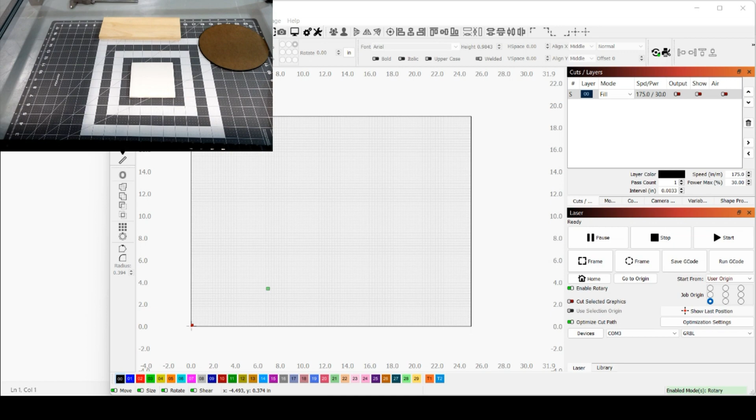Here we go. First thing we're going to do is create a rectangle. When you first create it, if it goes away, that's because it's on a layer that I just hid, so I'm going to show that layer.

Then I'm actually going to click away for a minute - I'm going to click it, and switch it to another layer, which you do by clicking on it and coming down here to any other layer. Let's just say layer 23. And then now I can actually hide the first layer again.

So we're going to take this rectangle and make it 4 1/4 by 4 1/4. Now I have mine in inches - if you have yours in millimeters, just measure your millimeter size and go from there.

So the material is my square right here, and you're going to want to come up here to unlock it, and I'm going to change it to 4.25, tab, 4.25, tab, and change it to line. It's not really a good dark color, so let me change it down here to 20. Here we go, it might be a little better to see.

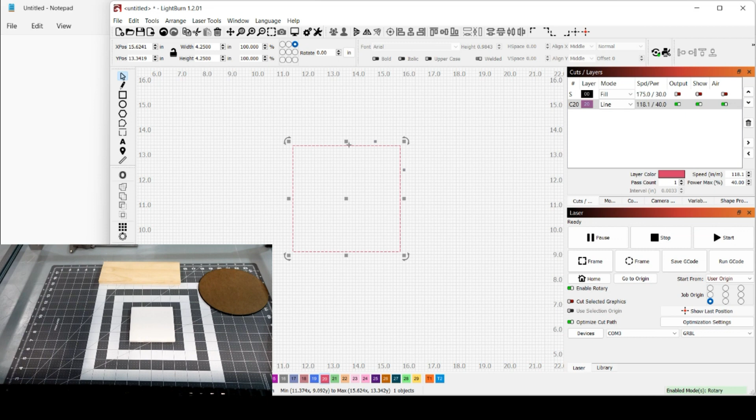So basically this represents my tile. Now I know this is 4 1/4 by 4 1/4 - this is the exact size of what I want to burn on. So whatever I put inside of this is what's going to fit inside there.

So if I turn on my Baby Yoda logo - let me click on it, oops, it's not locked. You want to make sure it's locked so it stays in proportion. I'm going to shrink it down, and let me move it up in here. So now I know the size of my Baby Yoda is going to fit perfectly inside that rectangle.

Now for me, I would probably make it a little bit bigger, and since I make sure I have it locked, I'm just going to increase the width, or you can, and it will increase the height accordingly because we have it locked, or you can just change the percentage.

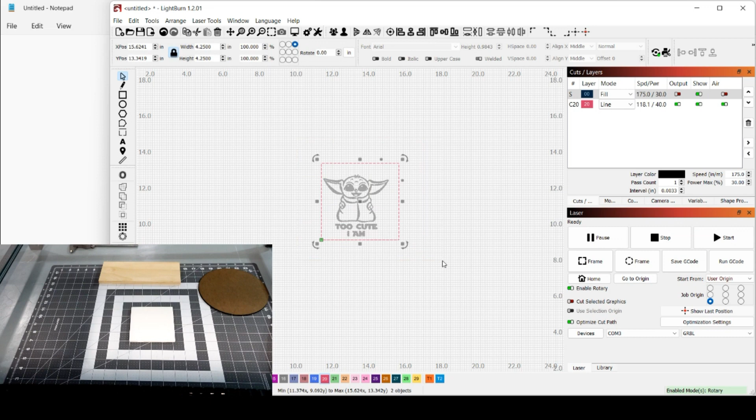And then what I'll do is I can select them both, come up here to center, and it's going to center it. So that's pretty much what I want to burn.

So what we need to do is set up the laser so that it's going to be right where I want it on that material. There's a couple different ways to do that.

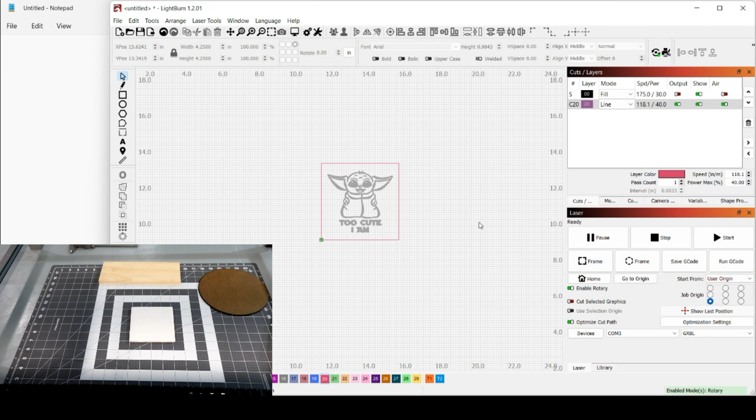In Lightburn, you have user origin, current position, and absolute coordinates. The two that I use the most are user origin and current position, and I'll go through both with you so you can decide which one you want to use.

Your 9 dots here represent where you're going to start burning on your material. You see the green dot here, that's the lower left. If I plan on my laser starting from the center left side, that's where I'm going to choose. If I want to do center, I'll pick center. So wherever that dot is is where you want your laser to be.

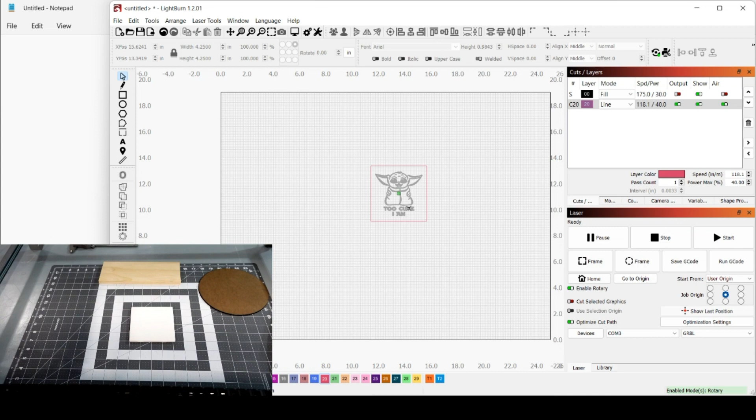If you zoom out, let me just turn the camera off for a second here. If you look on Lightburn, you'll see the little red crosshairs, and that's where the software thinks your laser is, and mine actually is. Mine's always to the left.

So what you're going to want to do is click Home, and this is for the 6550 Pro. If you don't have the 6550 Pro, you just need to make sure you know where it's at, as opposed to where the software thinks it's at, and I'll show you both right now.

If you have the 6550 Pro, just click Home and Lightburn's going to home your machine. If I click on the Move tab and click Get Position, it thinks it's at 0.039, and if I look here and click Get Position, that's where it thinks it's at on the machine.

So what I'm going to do is actually move my laser. Let me move this here. If I click here, I'm going to go to Arrange, Move Laser to the lower left corner of my selection. Now I'm going to turn my camera back on for you, and you'll see my laser coming in, and that's where it thinks my material is.

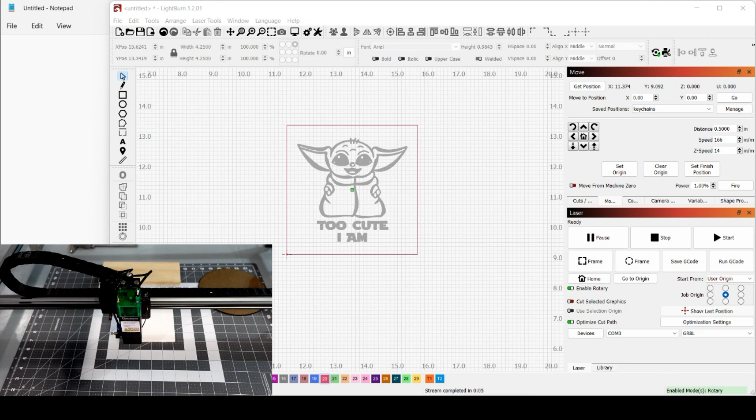So the laser now thinks it's on the left corner of your material. I'm going to zoom this out a little bit for you. What you could do is actually move your material to there, or you can move your machine up to where the left corner is.

I usually move my machine there. It just makes it a little easier for me, as long as it's not a far distance. You want to get it as close as you can, and then you might be able to just move it a little bit. But remember, you're going to be off from your actual home position for the 6550 Pro.

For the regular 6550, you could do the exact same thing. Just move your laser to the bottom left, tell it to come here, and then again just move it by hand to where the corner is.

Now I have my shield off so you can see, and what we're going to do is—if you don't have the fire button here on the Move tab, you can get it by going to Edit. Actually, let me show you. Hold on one second here. Okay, you can get it.

Let me turn that off. You can get it by going to Edit, Device Settings. And Enable Laser Fire button right here. So you turn that on and click OK.

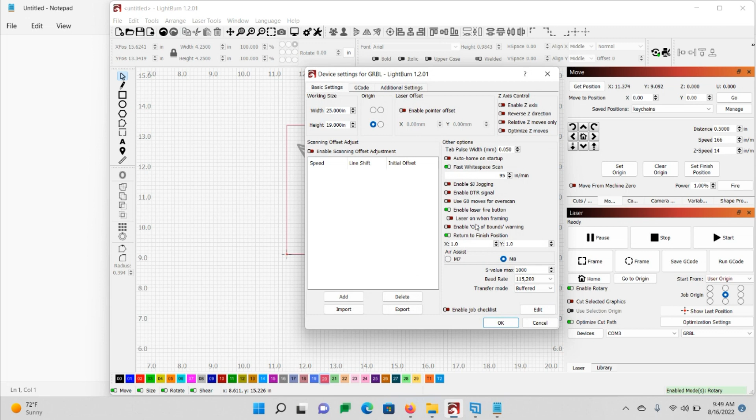You may have to close your software and reopen it again. But what we want to do is set it to 1%, and then we're going to click Fire. Let me turn that back on. When you do that, you're going to notice your laser light come on, and it's going to be on really low power.

Now, I don't want to keep mine on because I don't want it to burn my mat here. But I'm going to need to lower mine down a little bit because obviously I'm up way too far. Get that down a little bit here, and get your distance that you need from your material.

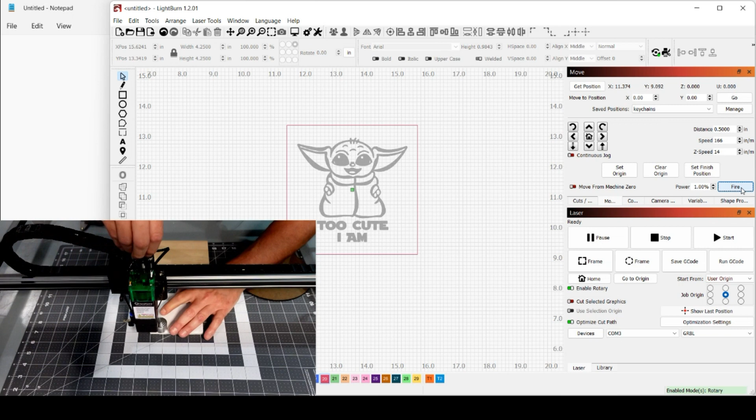I'm just going to get mine close here. We're not going to burn. We're going to want that light to come on right on the corner. So what I'm going to do is turn the fire button on, and then move the laser slightly so it hits that corner, which is right where I want it, just on that corner.

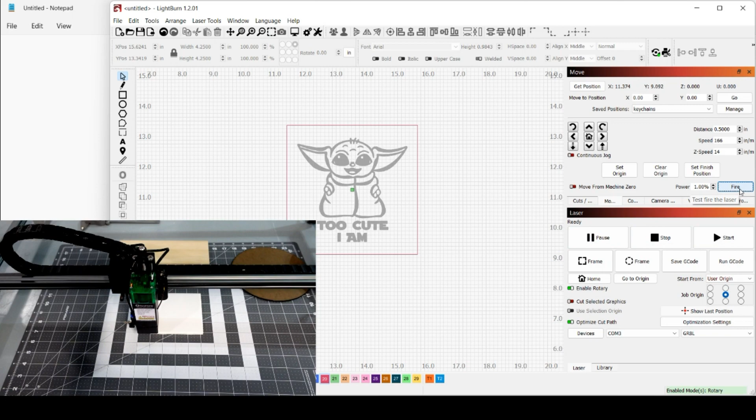Turn the laser off. Let me lower the camera so you can see what I'm talking about here, that might give a better angle. So hit the fire button, and I have it set right to that corner, the bottom left corner. Now I'm currently on user origin, and I want mine to be the bottom left corner of my material.

So I'm going to make sure I have user origin, bottom left hand side checked. And then, before you do a frame, if you want to be positive, click on your frame and then go up to arrange, move laser to the lower right of selection, it's going to move over, and now turn your fire button on again.

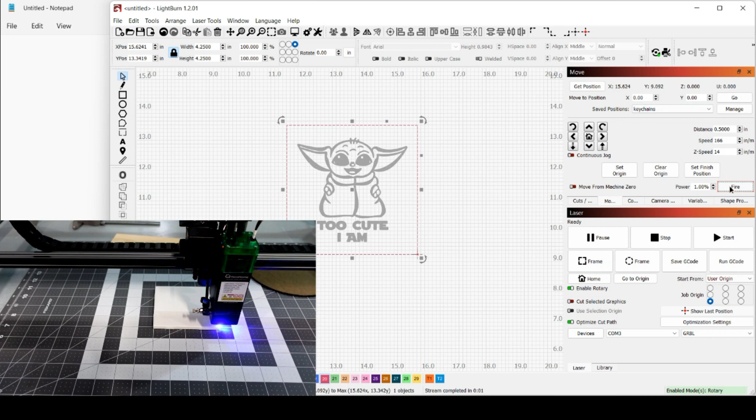Now if you find it's too far up the material or too far down, I lost my little marker. If you find it's too far up or too far down, then you may not be in square. But what we're going to do is turn the laser on, and we want it right on this corner. That's pretty much how I set mine up, and it's dead on the corner.

Now I'm going to go back, arrange, move laser to left side, and then click set origin. Remember, we're on user origin here, so we need to set the origin. Now no matter where you move your laser to, it's going to bring it back there. So if I jog my laser to the left a little bit, I can say go back to origin, and it's going to put it right back there.

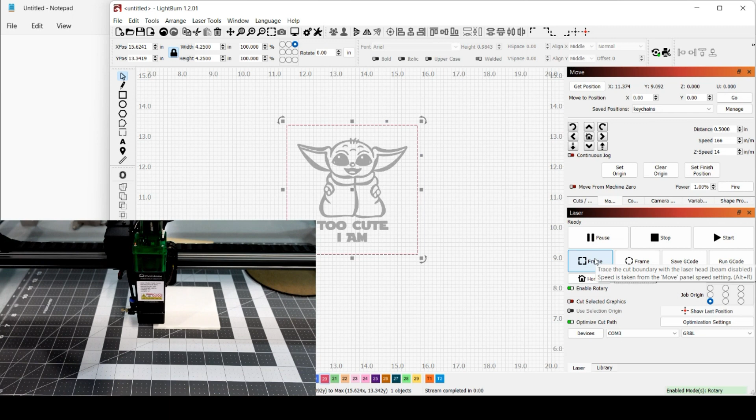So now we're going to do frame and have it frame the whole material. But if you hold the shift key when you hit frame, it makes the laser come on at a low power, and I'm going to watch the laser as it goes around the entire piece here, making sure it stays just on the edge.

If I do my frame and it goes off on this side too much, and on the material on this side over here, then I'm going to grab this wheel with my hand and move the laser a little bit like that. So let's go ahead and hold the shift key and click frame.

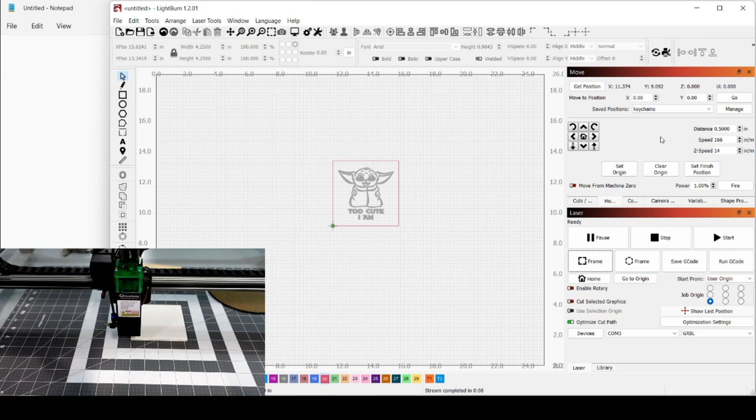I'm watching the laser and making sure it's staying on the material. One thing I should have mentioned earlier, under your layers, make sure you only have your frame layer on. Let me move this over a little bit here.

So we want to have the frame layer on, because that's what we're going to trace here. And if you find your laser's moving too fast, hit the move tab and slow it down a little bit. I'm going to slow mine down to 130, and then hit frame again.

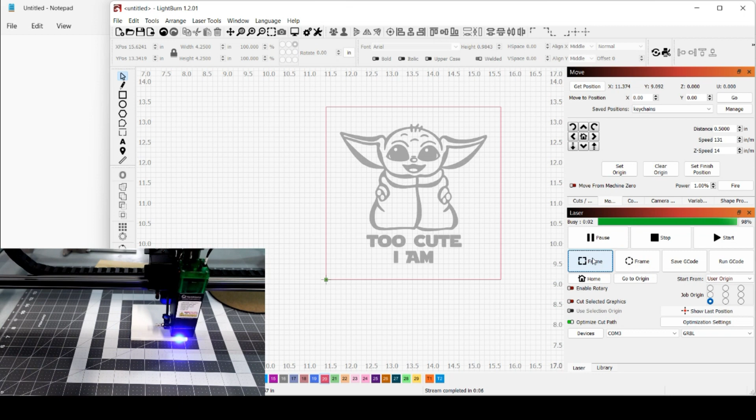If you notice on mine, on the right hand side it's on the edge, the top is off, and the left side is a little bit off. So I'm going to pull this to the right just a tad, very, very little bit. And it's off here too, so the same thing with pulling it backward, just a very, very little bit.

And I'm going to hold the shift key and hit frame again. That's good, that's actually perfect there, perfect on the back, and perfect on the left side.

So now that we have that, we already have our origin set, and now I feel confident knowing that if I go back to cuts and turn on output on the Too Cute I Am, click on preview, right click, go to preview, you can see it's going to cut inside of that square, and you want to make sure you turn your framing off.

So it's only going to do your logo artwork or whatever you have, and then you should be right within the center. Even at this point, if you want to triple check yourself, does it think this logo or the artwork is going to be placed correctly?

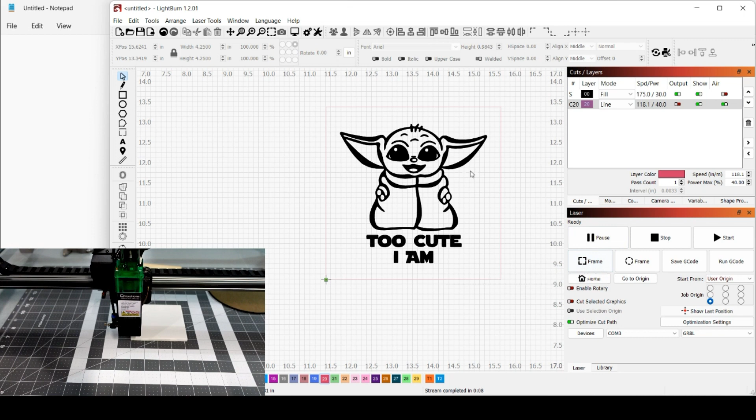If you hold the shift key and click frame now, it's actually going to frame the actual Yoda itself. So if I hold the shift key and click frame, as you can see, it's actually going to frame just the area that it thinks the Yoda is in. So I'm pretty much dead on now. And that's how I would do it using the user origin.

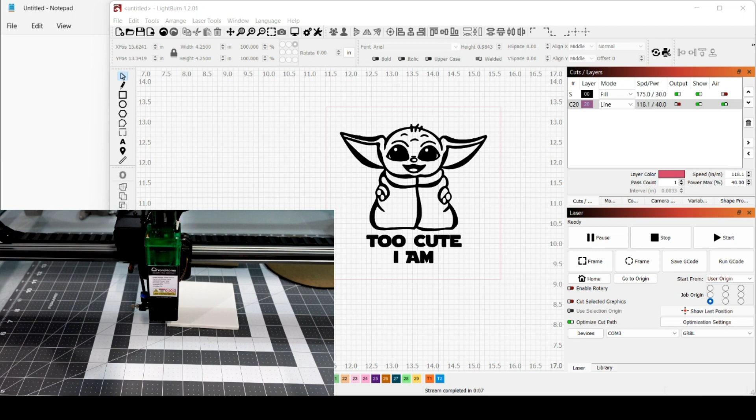Now that's the exact same thing if you had a rectangle. So if I had a rectangle, I would do the exact same thing. So for example, on this, let's just say hypothetically that is 9 1/4 by 3 1/2. So I would come over here. I mean, I can actually just leave this if I want. And let me get rid of my camera for a second here.

I would create a rectangle. Here, I'm going to deselect using the rectangle. I'm going to unlock it. The width was 9 1/2, I think I said, by 3 3/4. I forgot that quick. 9 1/4 by 3 1/2. I was way off. 9 1/4 by 3.50, 3 1/2. And now I'm going to lock it, and I'm going to turn off the Yoda for a second here, and I'm going to turn on the rectangles.

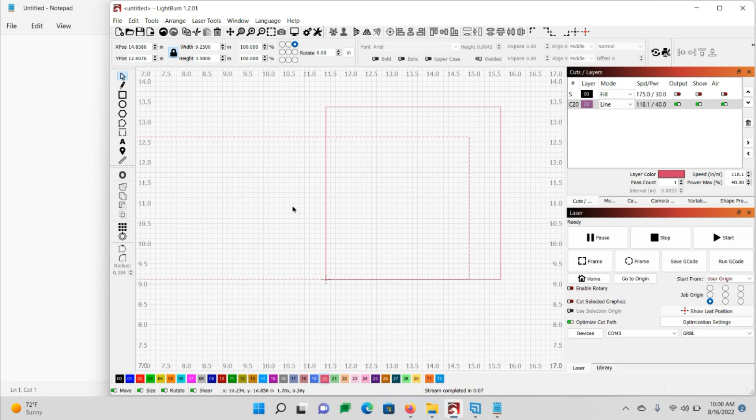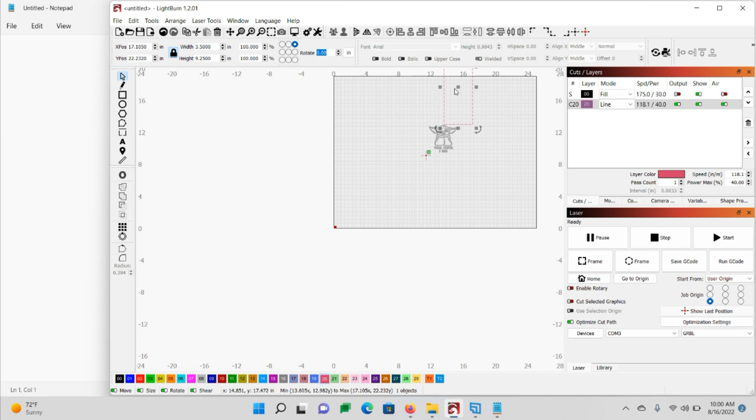So as you could see, if I wanted to, I could now burn within this rectangle. So let's say I get rid of this square because I don't have that hypothetically. Now I have a rectangle. If I want to put the Yoda inside the rectangle, I could shrink it here, or I could click this rectangle and rotate it up here 90 degrees. And whoops, bring it down here. And I could put my Yoda inside of that if I wanted to, and I would know.

Actually, if you look right now, my Yoda's too big. If you can see, if I turn my board, I would actually be over. So that's why I like doing it this way. So now I know what size to make the Yoda. So I'll shrink the Yoda. And another thing I want to show you too is, see how I just did that? Let me undo that. Whoops.

If I want the Yoda to shrink dead center evenly all the way around, up here you see the 9 squares here. This is going to be where your center point is, your anchor point, let's say. So my anchor point right now is in the middle. So if I lower the percentage, it's going to shrink everything to the dead center. If I click on the bottom left, it's going to shrink everything to the anchor point on the bottom left. So that's one good thing to know also. So that's how we do the user origin.

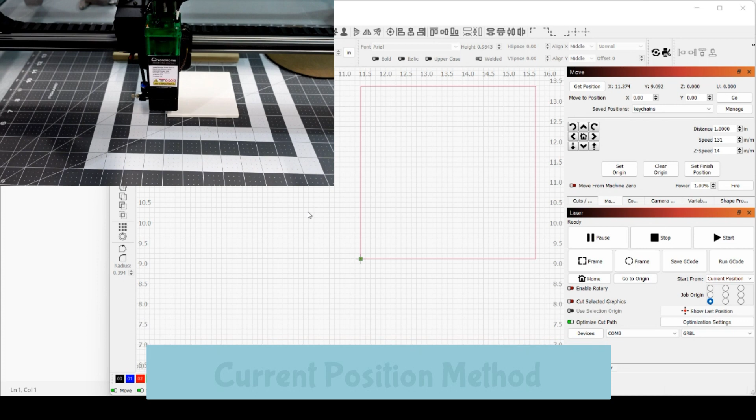Okay, now another method is using current position. So what current position does is wherever your laser is, it's actually going to start lasering at the anchor point. In other words, right here, let's just use the bottom left as an example, as opposed to center or top right or whatever. So no matter where the laser is, it's simply going to start from wherever it's at, as if it is sitting at the bottom left hand side of your image, excuse me, on the screen.

So this is the square we have, and right now if you look here, if you click this show last position, you'll see the plus come off and on. The software thinks the laser is right there, and we're using the bottom left origin as where we want the laser to start from, which is where the green square is. So if you'll notice, I'm going to click frame, and the laser is simply going to frame the square where it's at.

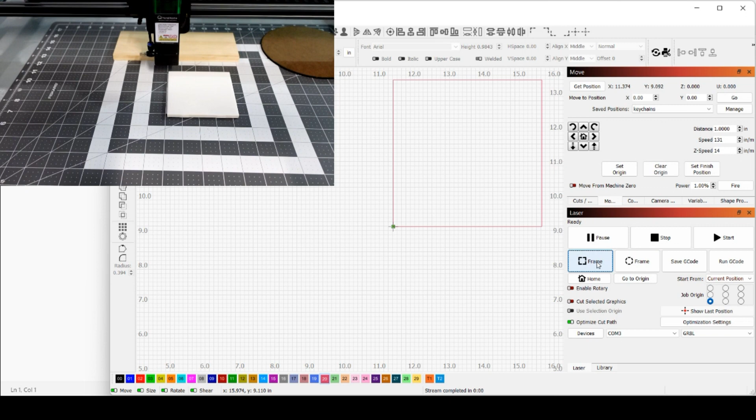And what this is kind of for is, let's say you don't want to move your machine by hand, you only want to move it using these move controls, very, very little, then you could actually do that. Let's say you would move the laser over here, let's move it down. And if you see here, you see the little crosshair. This is where the software thinks the laser is. However, it's going to start at the current position, right here.

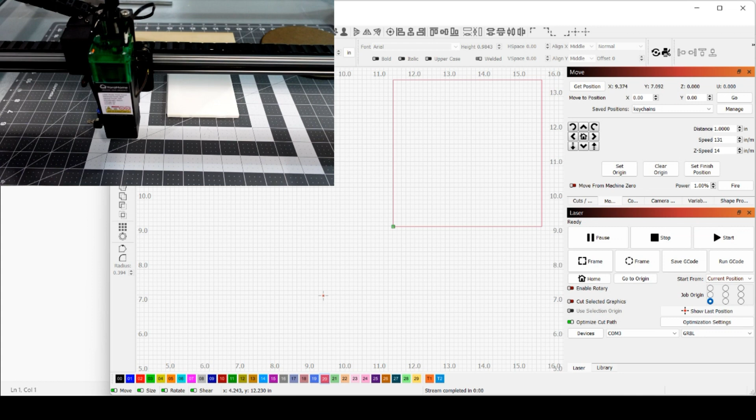So if I click frame, it's just going to simply start framing this right where it sits right now, as if it's over your material. So again, what this is for is, let's say that you home your machine, and you want to move your laser all the way over here. Here's a great example. Let's say my material is here, and I want to move my laser over to the right.

And then down, over, maybe one more. Just hypothetically, let's say that's it. I'm pretty close though. If you'll notice, my laser is actually here on the physical dimensions of the machine, I guess you could say. However, because I have it set at current position, bottom left, it's actually going to start right here. So if I click frame right here, it's going to frame my actual square because that's simply where it's starting from.

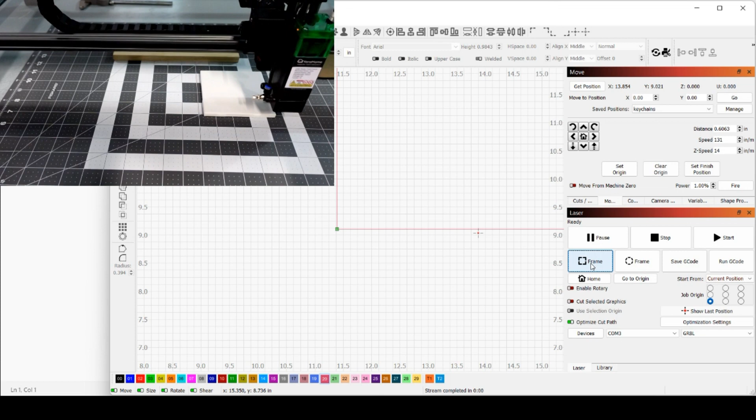This also applies if you want to start in the center. Let's say you have a mark right here in the center, and that's where you want to start from. You can actually click on your job origin over here where the current position, we're going to say click center, and you see the green dot now is here, the green square. That's where it thinks it's going to start from.

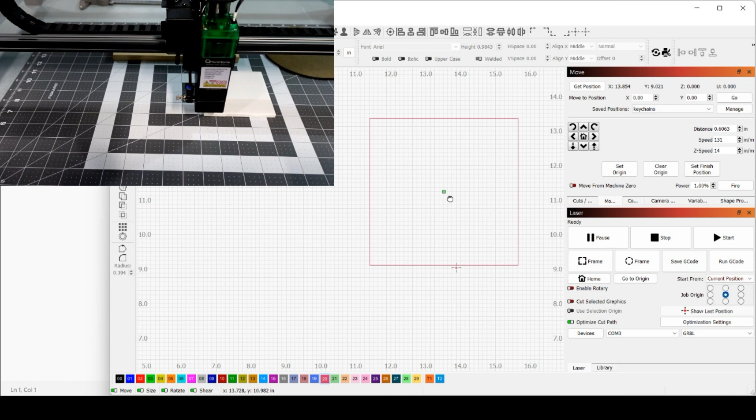So actually, hypothetically, if I clicked frame right now, it's going to come down to the corner here and actually frame the square and then go back to the center. But in this instance, I could actually just move my laser. Let's just say hypothetically it thinks that's in the center. I could actually just now click frame, and it's going to actually think that it was in the center of my material. So that's what current position is.

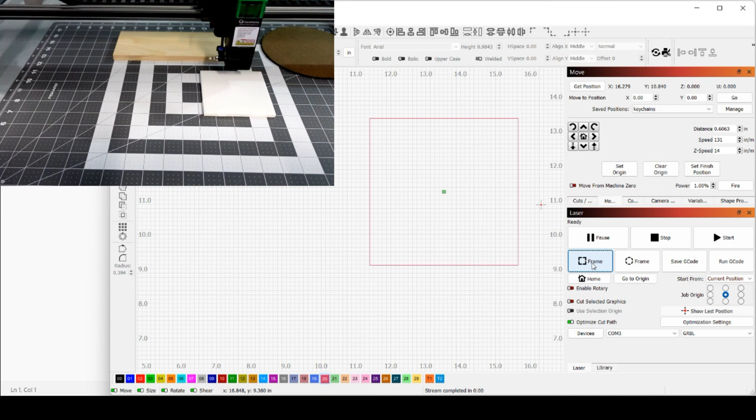Pretty much it's going to start wherever it's simply placed at, wherever you have your origin on your software on Lightburn. So I hope that you kind of understand that a little bit. It's more so of you wanting to move your laser head and have the software ignore where it thinks your laser actually is. We don't care where it thinks it is. You can actually turn the plus off. It doesn't care where it's at. It's simply going to assume that it is right there where the square is every time.

So that's kind of handy for different things. I actually use that when I do the tumblers. It's one of the things that I use is current position, because I don't want the laser to care where it thinks it is. I want it to start where I tell it to start. And it's really handy for tumblers and things like that. So let's move on to absolute coords.

So absolute coords is, let's turn on my laser position. What absolute coords does is, so the machine thinks my laser is right here. If I click get position, it thinks my laser is right here, okay? But if you look at my screen, my laser is actually on the left side. So when I tell this to frame, since it thinks it's right here, it's actually going to move down to the bottom left, then go all the way around, and then it's going to come back to the bottom left every time.

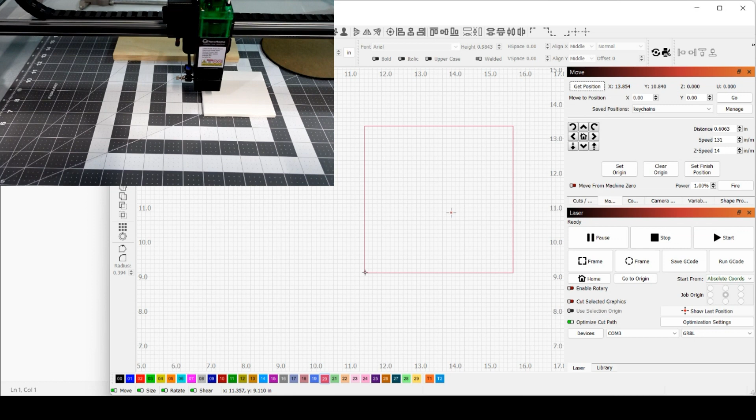So I hit frame, and what it did was it moved from here over to the bottom left corner, went up and around, and then came back and stopped where it thinks the bottom left corner is. Now, this is just that Lightburn didn't keep up yet. So if I come up here and click get position, you'll notice now it put the crosshairs back down here, because now this is where it thinks it's at.

So let's just say I move my laser over to here 2 times, 3 times to the left or whatever, it's actually going to move back to this corner and then go up and around. This is good for a couple different things. Let me go ahead and click frame, and I'll show you. It's going to move here real fast, and then it's going to come up over and then go back around.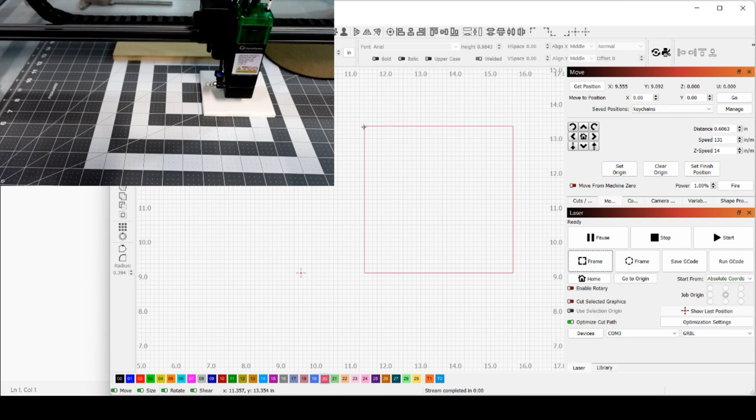So let's say you wanted to move your material. So if I move my material down, I'm sorry, I didn't click get position. Remember, it thought it was here at this corner. So now I moved my material down a little bit, and I'm going to move it over some. Now when I click frame, it's going to actually shoot down to this corner and then go up around and end back at this corner.

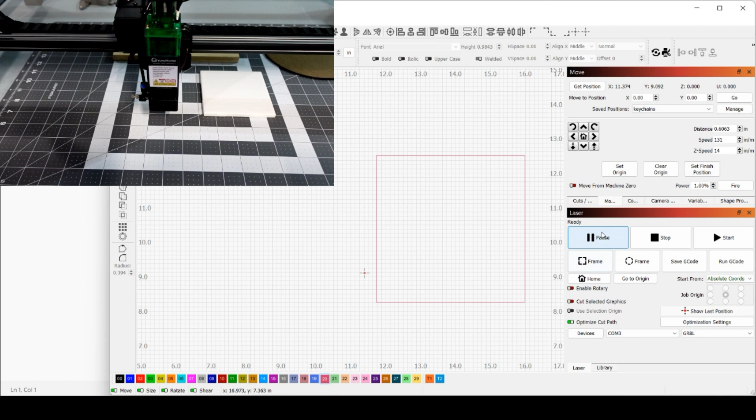So this is another way that you could do it if you have different layers of things. It's actually okay for doing tumblers as well. So I'm going to click frame and show you something here.

And if I click get position, now you see it thinks it's here. I think one of the things that this is good for is, if you've ever seen some of the different stuff, like if you do 3D, different layers from a CNC machine, you can actually have a material placed on the bed, and let's just say the laser is just a little bit off. Let's just say it's a bird or something like that here. You could actually take that, click it, and you could move it up a little bit and over a little bit, up a little bit, over a little bit.

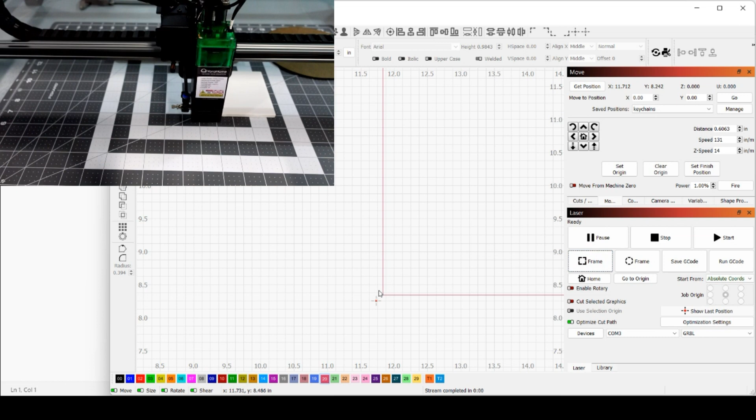And even if you're using the cameras, if you have a camera and it takes a picture in the back and you see the background there, when you do that, now if you do frame, it'll actually move to here and it will change where the start position is, and that's the absolute coords. It's going to be the bottom left hand side every time. So I'm going to click frame. See, it's going to move up, and now it's going to frame that. And it's going to think that it is right there again.

So, you know, there's different ways that you can do it. It really depends on what you're trying to burn. The two common ones that I use are the user origin and current position. They're the two main ones that I use the most. I think actually what I do use the most is user origin, honestly.

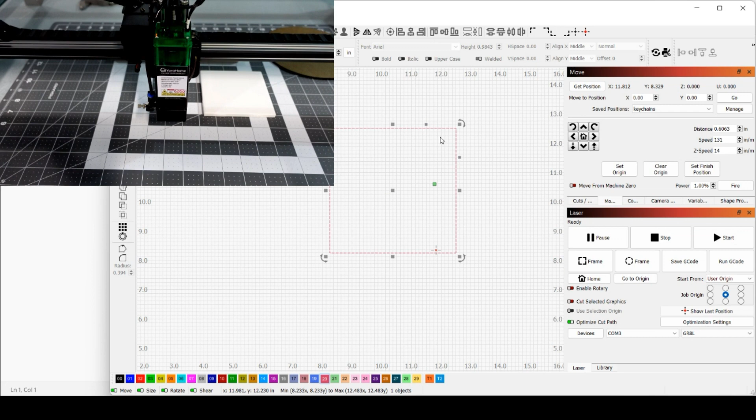Okay, I want to show you real quick. It's easy to find the center of a square, and it's easy to find the center of a rectangle, and it's not so easy to find it of a circle. Sometimes you have it, sometimes you don't. But what I want to show you is, if you don't have the center for a circle, an easy way what I do to carve on a circle. So I'm going to go ahead and delete this rectangle. I'm going to home my machine. If you have a 6550, the regular one, you could just move the laser out of the way by hand, completely up to you.

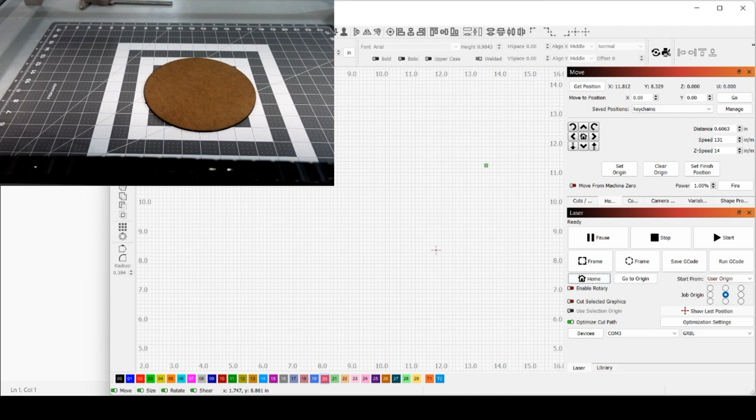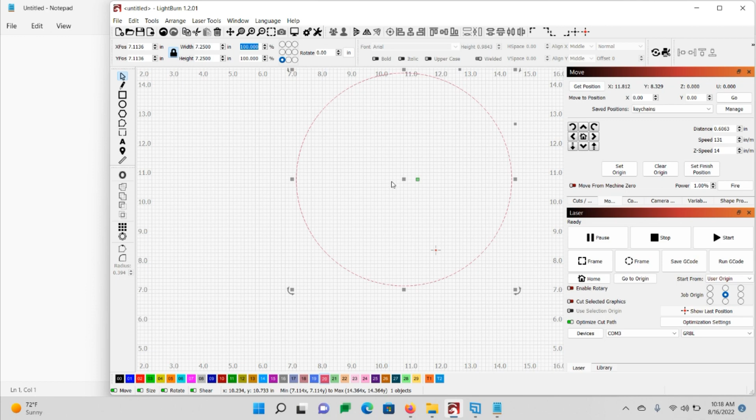And I'm going to take this circle right here, and I'm going to measure it. It is perfectly round. It is 7 1/4. So 7 1/4 is what I'm going to make a circle on my screen. So I'm going to click the, let me move this out of the way here. I'm going to click the circle icon, just drag a circle, then click my arrow, make sure I unlock it. I'm going to do 7.25 tab, 7.25 tab. And now I'm going to lock it again. And now I'm going to move my circle down here, anywhere on the screen. I'm just going to move it over here so that I could turn my camera back on.

And one of the things that you need to do pretty much is we just need to get our laser close to this, and let's see, if we go get position, of course it thinks it's right here. One thing you could do is just have the laser come up in the middle of the machine, and then you move your circle over to it, hypothetically. So if I click here, I'm going to move this over so you can see it here, and I'm going to tell my laser to go to the center of my circle. So make sure you have, I have it here, user origin. Probably could use current position, would be okay.

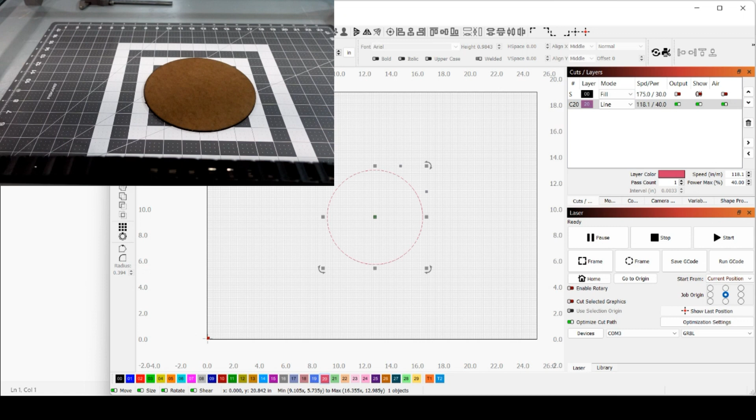But what we want to do first is just click your circle, make sure its output is on, and whoops, what do we have here? We have my little Yoda. And then what we're going to do is go to arrange, go to move laser to selection center. So now it's going to move my laser where it thinks the center of my circle is, which is right there. Well, clearly we know that it's not because we're looking right at it. It's not where it needs to be.

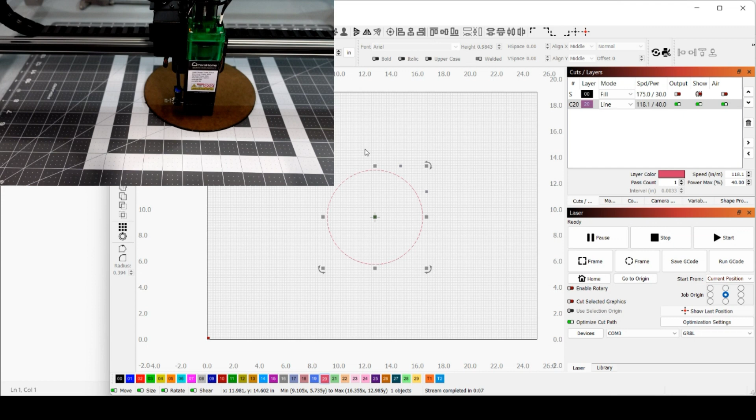Now I can move my circle down or whatever I can do. Now for me personally, I'm going to move it by hand. I'm going to pull it up to where it's pretty close. Now if you have it marked in the center, of course it's going to be simple. You just put your laser right on the mark there. In this case, I'm going to move my material a little bit, and I'm going to move it to where I think is the center. And then right now it thinks it's in the center. So pretty much all we're going to do, let me raise this up a little bit, is we're going to hit all 4 sides of the circle. So now it thinks I'm in the circle. And let me move this over for you.

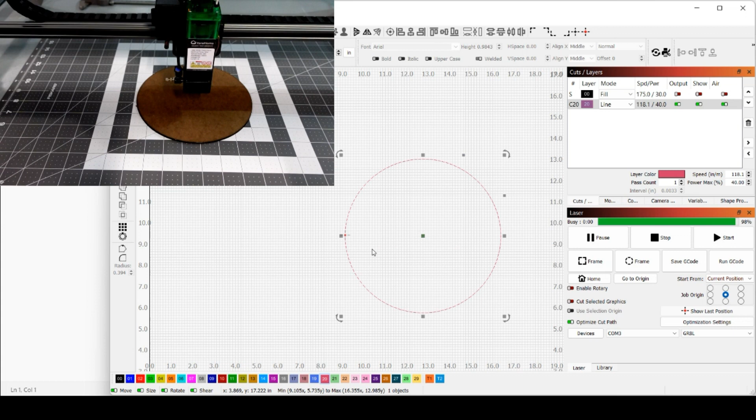I'm going to go up to Arrange, and then Move Laser to left side of selection. Now that it's on the left side, I'm going to click Move, and I'm going to click Fire. And as you can see, my laser is just a little bit off. So I'm actually going to grab the wheel here and move it just a little bit so it's just on the edge.

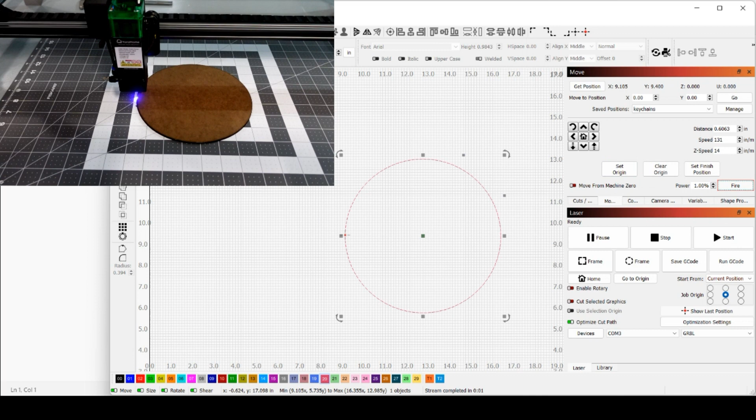And now I'm going to tell it to go to the right side. I'm going to go Arrange, Move Laser to the right side of selection. And you can see it's a little bit off the board. I probably should have turned that off. And then again, I'm going to just move it a little bit. So that gets us pretty close. Now turn the fire off.

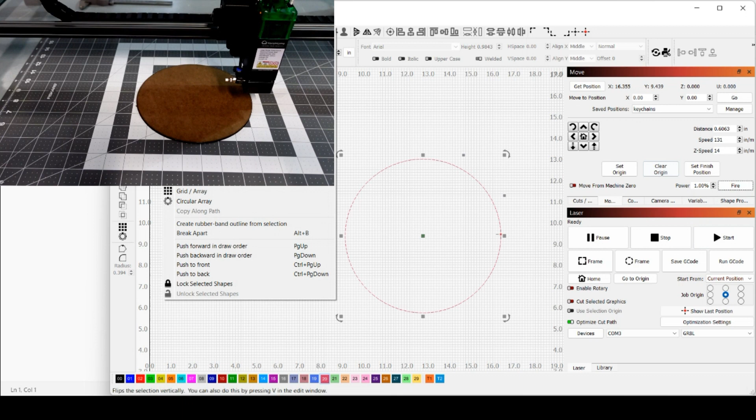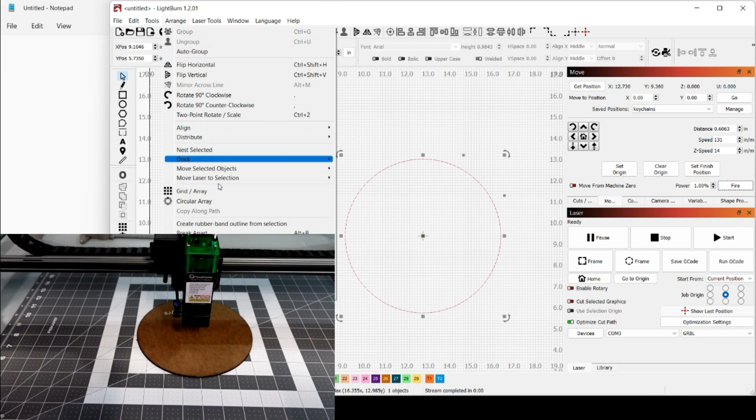So now I'm going to tell it to go back to the center. Now that I have it at the center, I'm going to go Arrange, Move Laser to, now that I had it to the selection center, which is where I went just now, I'm going to tell it to move to the top. Now that I have it at the top, I'm going to click the fire button, and as you can see, it is a little bit off, so I'm going to move it up a little bit and turn the fire button off.

And now I'm going to tell Arrange, laser to the bottom. It's very similar to a square that we were doing, but this is how I pretty much do it, and I do this usually only 2 times. Now I'm going to hit fire, and that's actually pretty darn good. So I'm now going to tell it to go back to the center.

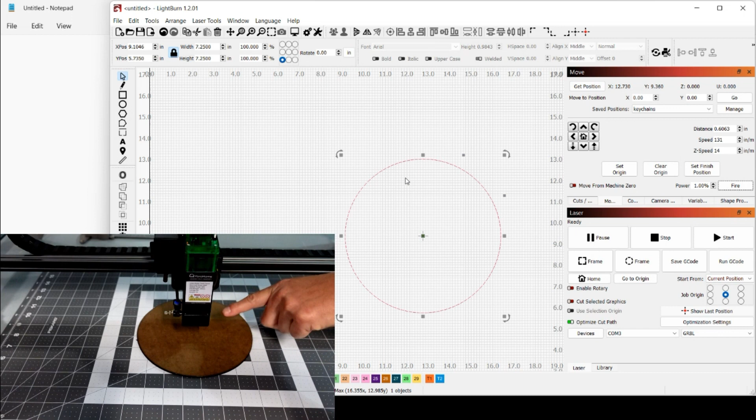So what we did was we went left and right, and then we moved forward and backward. And now since we moved it up a little bit, we're going to want to do the left and right one more time. And it actually doesn't hurt. Probably really should do it at least 2 times on both. So let's go through real quick.

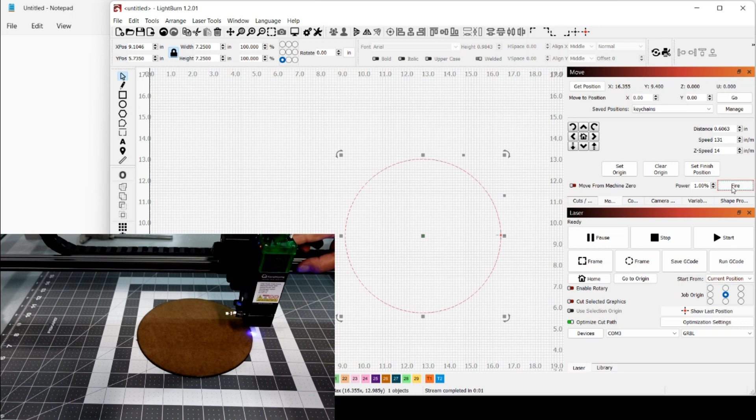Move laser to, so it's in the center now, so we're going to move it to the right side. We're going to hit fire, and it's a little bit off. See, that's what I was thinking it was going to do. So I'm going to just move it a little bit. Turn the fire off. Arrange, move laser to left side.

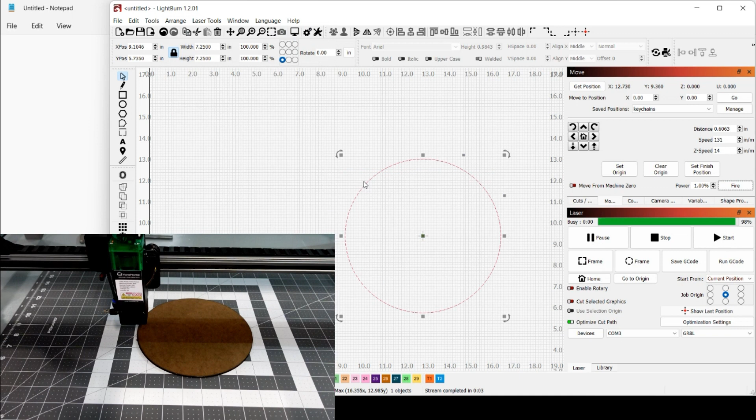Fire button. I might have done my measurement off a little bit here, but it's pretty darn close. Okay, that's good right there. Now I'm going to turn the fire off, go back to center. And then I'm going to tell it to go to the bottom.

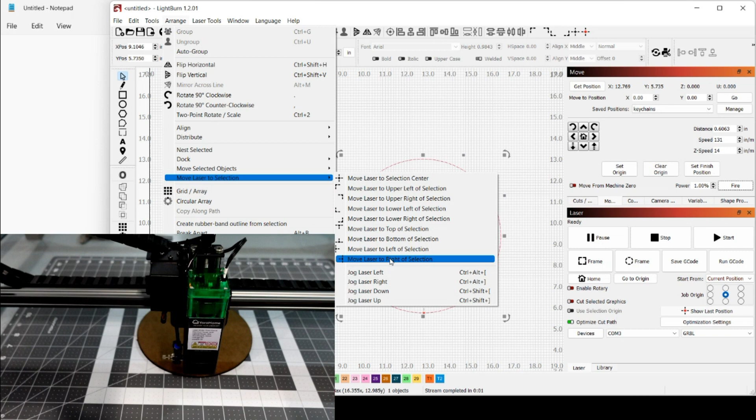You always have to go to the center first, because if you don't, it doesn't go where you want it to. So in other words, right now, if I said go to the right side, it's just going to move to the right, not to the right of the actual material itself. So, for example, without going to the center first, if I say just go to the right, it's just going to move there. It's not actually going to move over to the right side where I want it. So we always want to try and go back to the center.

And now I'm going to go back up to the top. Click fire. Pretty good. Could go a little bit, but pretty good. And so now if I go Arrange, I'm going to go back to the center. That should be right there, the center of my material. So now I have current position. And so now if I click Get Position, of course it thinks my laser is right there, which it is. I don't know where my green dot went. Let me unselect it here. Oh, there it is.

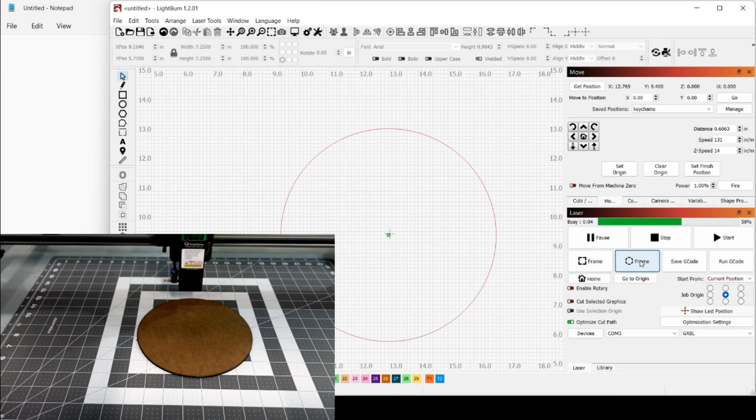So before we do that, let's try to do a frame with the circle frame here. So let's try this. So I did it without the laser on this time. Just wanted to make sure it was going to run first. And now it should shoot back to the center. And so now I'm going to hold the Shift key and click the round frame. And you'll kind of get an idea.

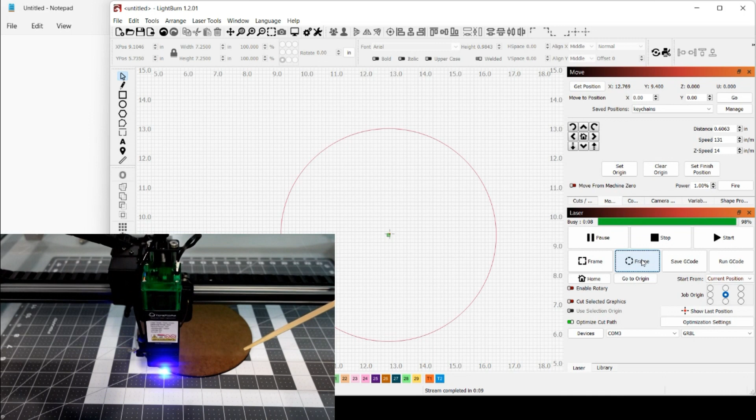Is it not on where it should be? As you can see, it's pretty darn close. It's perfect there. I'm going to do it again so you could see if you could pick out where it needs to be adjusted. Okay, ready? I'm going to tell you now. If you notice, it's actually on the material here, and it's off down here.

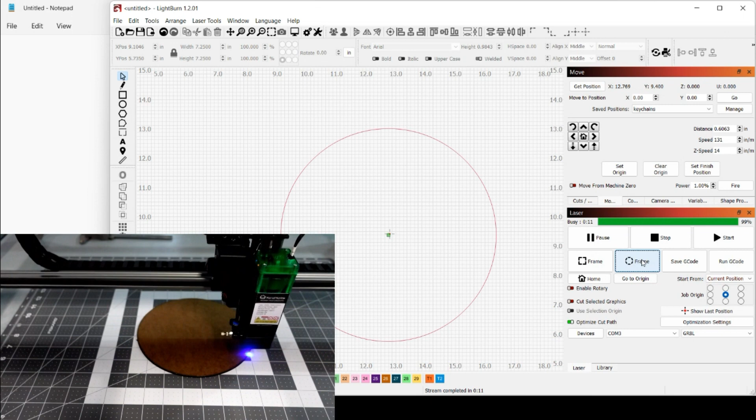Very, very, very little bit. So, hypothetically, you could just move this very, very little. Like I'm going to just nudge it, ever so little, like that right there. And theoretically, that should be perfect on there. So I'm going to hold shift key, click my frame again. That is pretty.

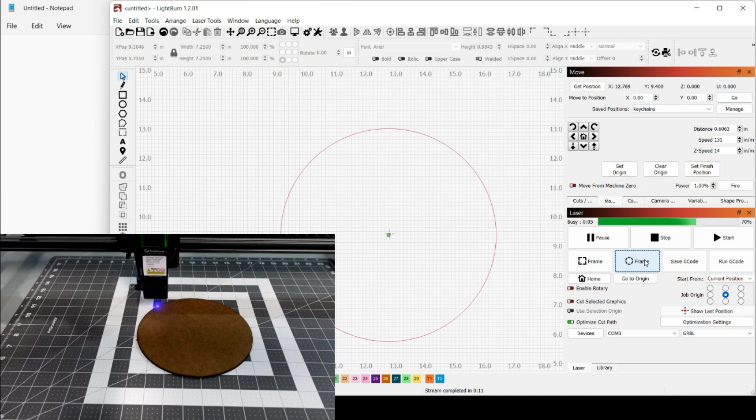Yeah. So that is how you find the center of your circle. So most of the stuff you're going to want to do, if you're doing a circle like this, you're almost always going to want to start in the middle, because that's just going to be the easiest way to do it. So now that you have this circle here, I think you can lock the layer. I don't remember how to do it, but let me see here. Lock selected shapes. So now you can't move it and you can't mess it up.

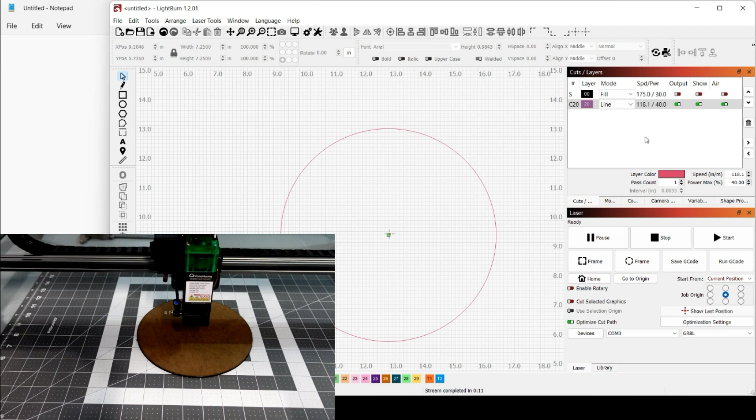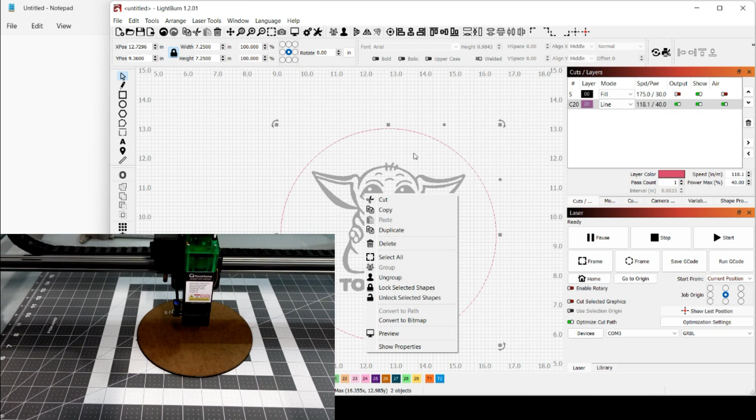So if I go back to your Yoda, now I could click on my Yoda. I could come here and make sure it's locked, and I could actually choose the center as the anchor point, and I could just make him larger. And then once I click that, then I'm going to select the outer circle. Whoops, I can't do the outer circle here. I'm going to select the Yoda, and then I'm going to center the Yoda. Sorry, click the Yoda. If you want to click them, then the circle, and then click center, and it's going to center the Yoda in your circle there. So now you know exactly where that's going to burn.

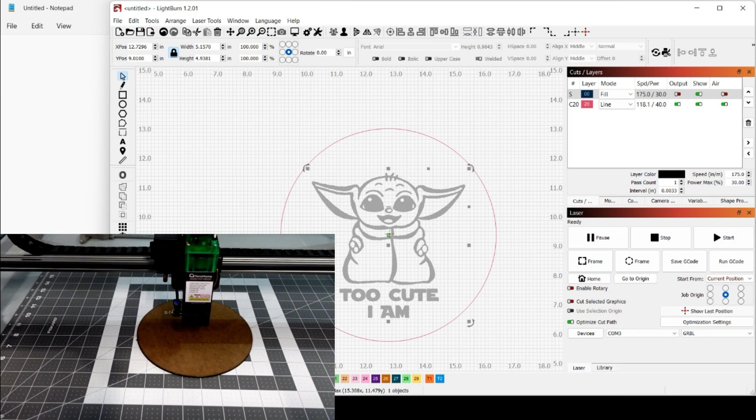So for example, there's too much space down here for me. I would actually move the Yoda down a little bit. It's just my preference. Let me turn that camera off. Yeah, I would actually keep the Yoda down here, and then you know where it's actually going to burn. So you would turn that on and turn the outer frame off, and then it's going to burn your Yoda right there. And with just the Yoda on, if you just click the round frame, it's actually going to just do a round frame around the Yoda now.

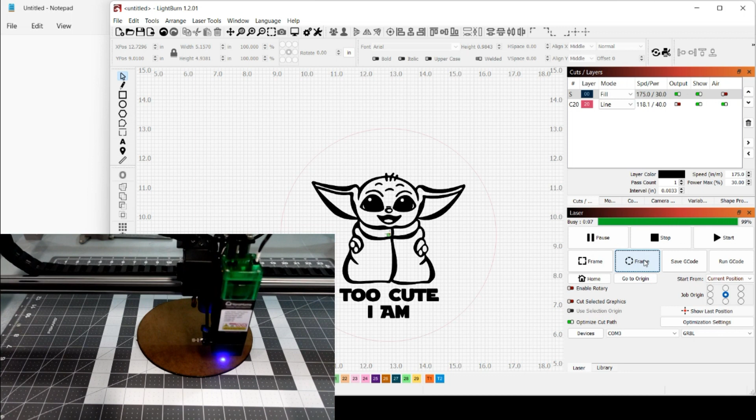And you're going to notice on my laser here, I'm going to turn that back on. You're going to notice on my laser, it's still going to be within the circle where I want it. It's perfect. So that's how you use the current position with your job origin here, your anchor point, as I call it, in the center of whatever it is that you're carving.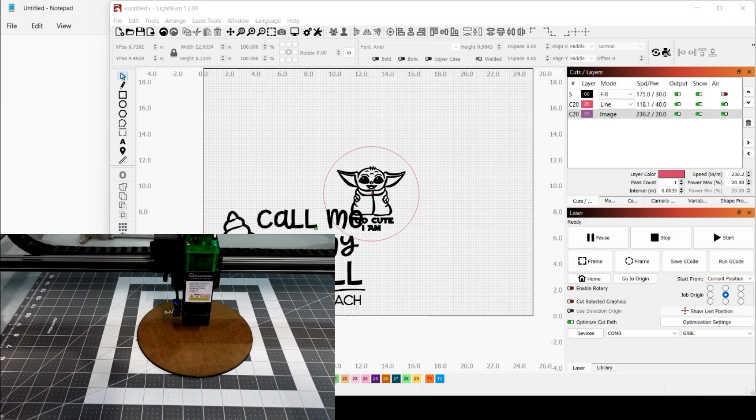Okay, there's one other thing I want to show you. I call it a bug. I don't know what you want to call it, but as far as I'm concerned, it's a flaw in Lightburn. Catches me more often than not. I personally use layers quite a bit, and I use a lot of layers. In other words, sometimes, like on this here, I may have Yoda call me on my shell, and then I'll have a few imports. These are all the different sayings that I may have on rectangle pieces of wood. And what I'll do is each one of them will be on its own layer, and then I simply put my wood where, let's just say, a template.

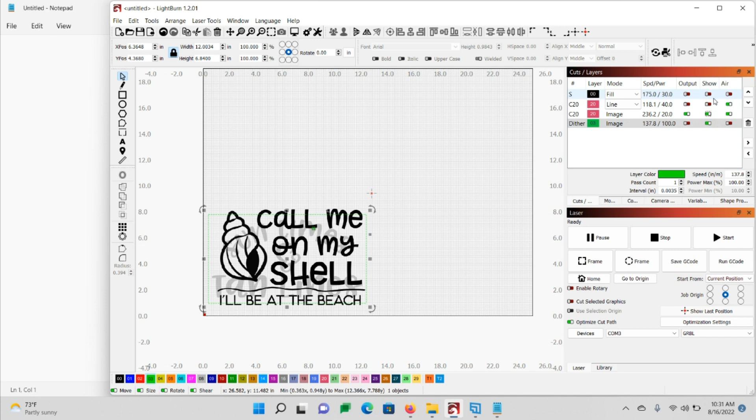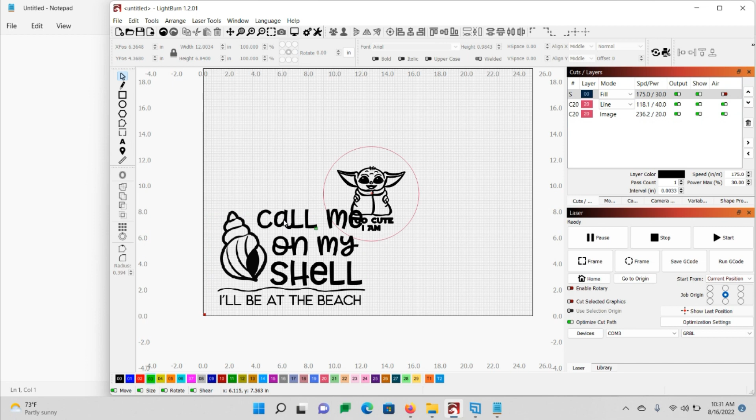So with that being said, let me show you what I call a flaw, a bug, whatever you want to call it, in Lightburn that gets me every time. And I'm going to show you sometimes why you may actually have this problem as well. I'm going to turn on the Yoda. I'm going to turn the output on, the Yoda, and my circle. I'm going to go ahead and take this one off. I'm going to delete this here just for the sake of argument, and I'm going to have the shell. So here we have the circle, and maybe I want to put call me on my shell. I'm going to shrink it down a little bit here in the circle also.

Before I do that, I'm going to turn the shell off, because I just want to burn the Yoda right now, okay?

So when I did that, do you notice the green square is right here? The green square now stayed center, which I have it center here. If I had it left, look where the green square is going to be. And if I had it center, it's right here. Now if you notice, it's actually center between my furthermost artwork on a different layer, and even though it's turned off, it doesn't matter. It still puts it center.

So now I have current position at center, it actually is going to start right here instead of starting in the center of my Yoda. So even if I turn the shell off, turn the output off, turn the air off, it doesn't matter, it's still going to start right here.

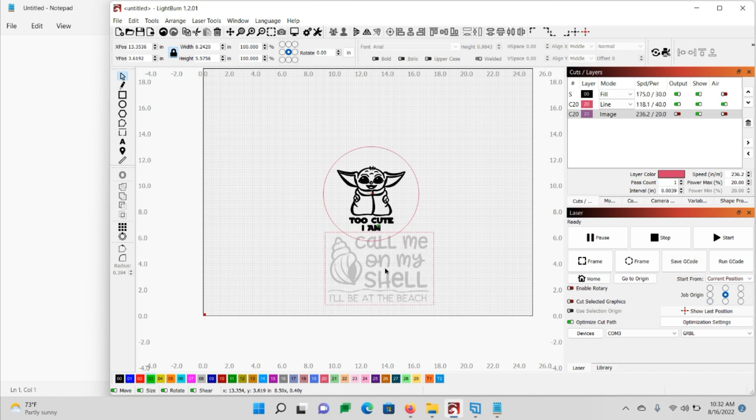So what I call a bug is it's still calculating where the other layers are on my sheet, and it totally messes me up. If you don't have this, you see the green dot moving with it now, it's center between that. If you don't have that dead center, it's just going to mess you up. And a lot of times I don't - I just like to have it wherever I want, and it messes me up.

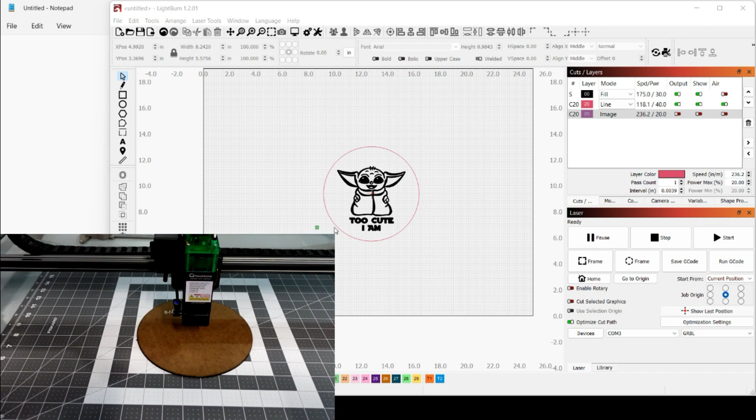So if you remember last time when we did the circle around the Yoda, it went right around here. I'm going to turn my camera on to show you now, you see the green dot here. Let me move this over to show you what I'm talking about. So now watch what the laser does - it's going to actually move. It's going to move here, but it's going to move so far over because it thinks it's going to start from here, and that's not what I want it to do.

So I'm actually going to hold the shift key and hit frame now, and watch where it's actually burning now. So keep that in mind if you have more than one image on your software that you have open.

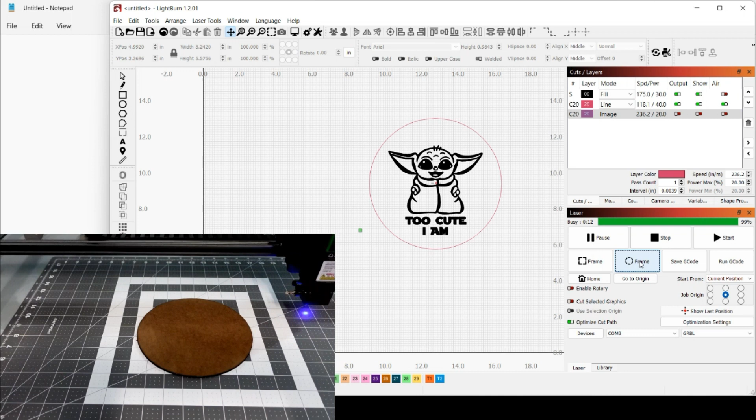If you have more than one image, it's going to take into consideration that other image, even though you don't have it on. Even though the output is not on, it's still going to take it into consideration. And it's very frustrating.

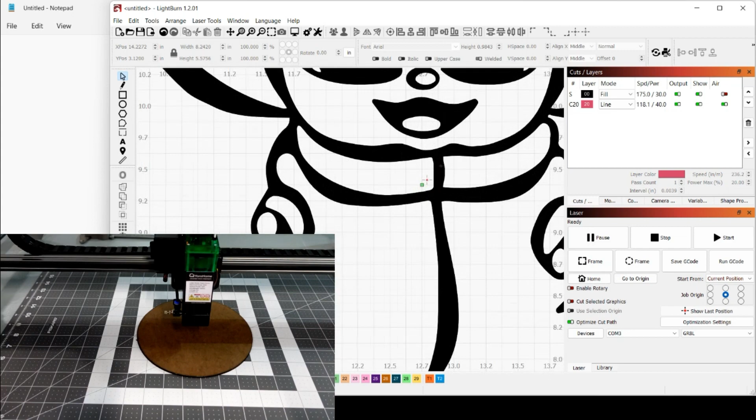And the only way to do it is you got to turn it on, and you got to delete this layer. So here, if you delete that layer, it puts the dot right back there again, as you can see, where it should be. So I don't know why they do that. I'm not sure what the purpose is. It's very frustrating. But that is something to keep in mind.

With user origin, you don't have as much of a problem, but it still can be a problem with it. That is just something to keep in mind if you have more than one image or more than one layer with different things on it, which I commonly do. Sometimes I'll have 10, 15 things, and I just turn them all off and turn on the one I want to burn.

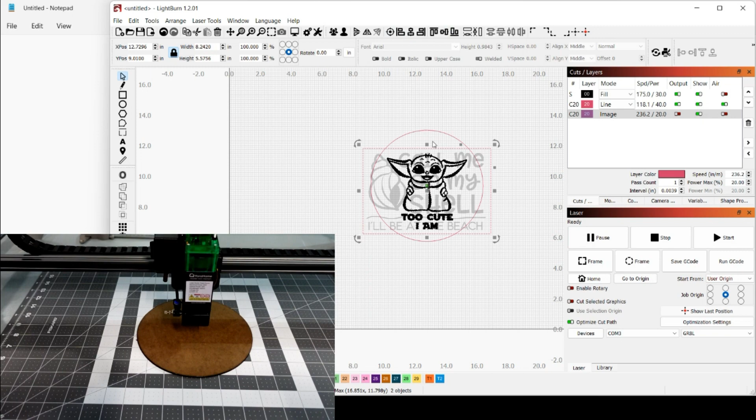And if you don't have it all centered - now what you could do is, if you center it because it is dead center of my Yoda, and I turn it off, well now it's not going to be a problem because it's still dead center of the Yoda. So that is another thing you can do also if that works for you.

So I hope this helps with the centering. It just takes a little bit of practice. Like I said, the circle - anytime you do a circle like that, I always want to start in the middle. But again, if you can't find the center of it, then just go left, go right, go back to the center, up, down, and do that a couple times until your laser is right where you want it.

Use current position and just make sure it's in the center, and go from there. And again, make sure you measure your material and make a frame of it, and use that as your guideline the whole time.

But just make sure you turn it off before you start your output, because otherwise you're going to have a circle on there. So there you go.

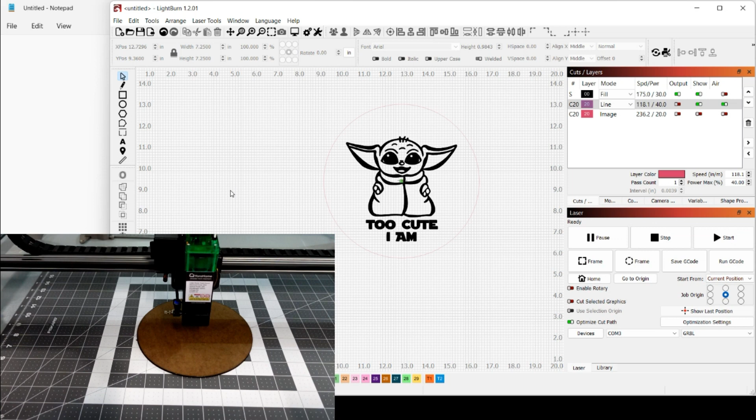I hope that helps. Again, if you have any questions, let me know, and I can cover something else for you, for replacing your material and centering. And that's it. Happy burning.